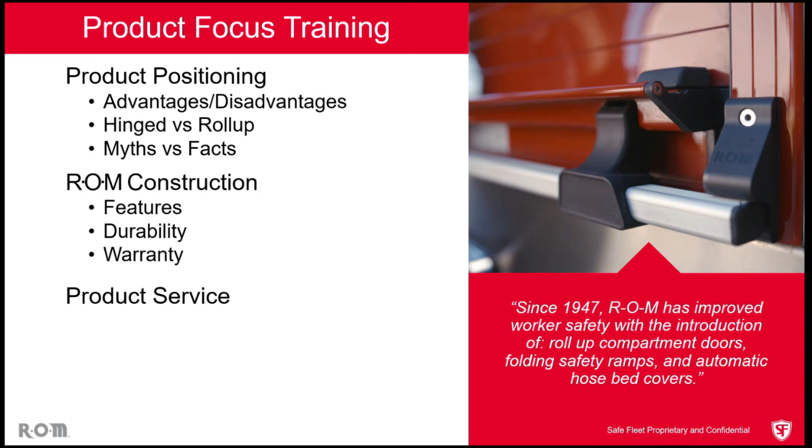We're going to dive in, talk about some of the advantages and disadvantages. We're going to talk about hinge versus roll-up. We're going to try and dispel some of the myths that are out there in the industry by talking about facts, and then we're going to dive into the specific construction of the ROM door.

When I have a hinge door, I've obstructed that access. The hinge door inherently on both sides is blocking that tray. So now I can only access it from the front, which means for the most part, only one firefighter can get in there and get at that piece of equipment.

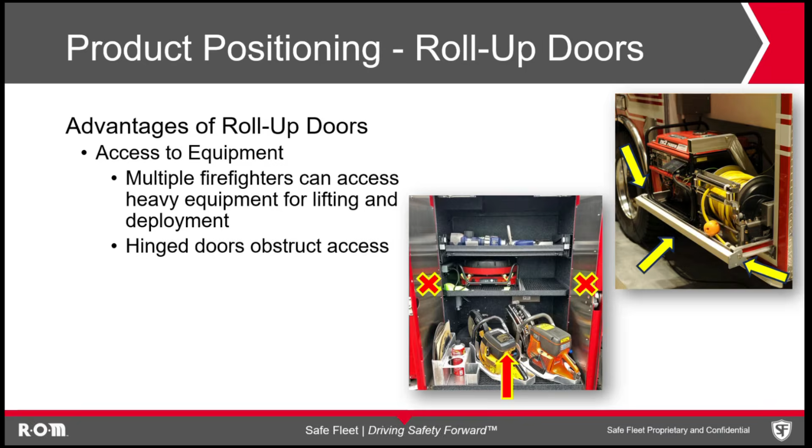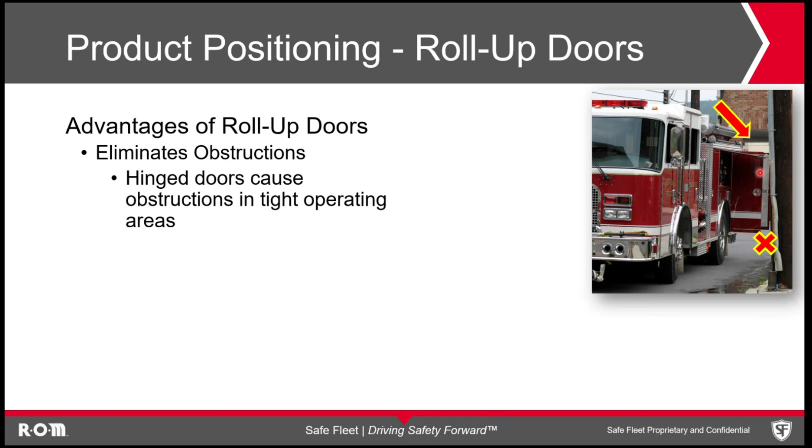The other advantage to roll-up doors is we eliminate obstructions. With this hinge door in this picture, I've got a telephone pole here. If I'm getting something out of this compartment, I now need to go back around this pole because I'm blocked. If the operator didn't stay far enough away from that pole, this compartment would be completely inaccessible because I wouldn't be able to raise the door.

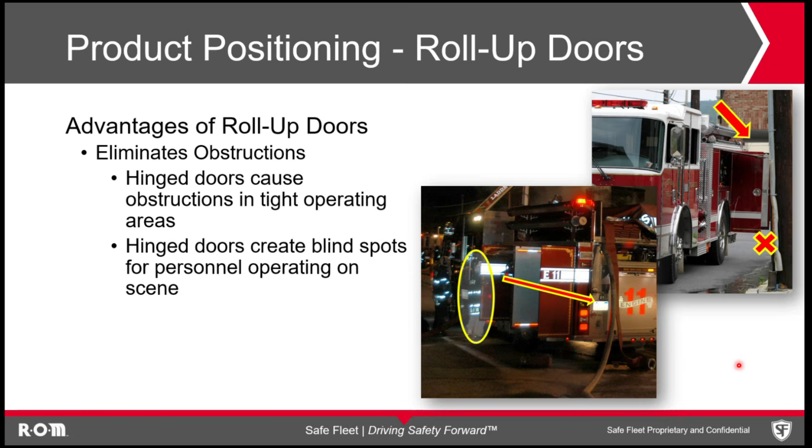Sight lines are also critical. With hinge doors, in this example, I can't see the back of the rig. So the pump operator here in the circle is hidden from potentially oncoming traffic. He also can't see some of these lines that are deployed and operating. With the roll-up door, you just have a clearer area to be able to see things.

Everyone hates the beep, beep, beep of a door being open. There's so many false alarms in the industry that people tend to ignore them. If I ignore that my door is open and I have a hinge door, it can cause serious damage going out of that apparatus bay. In the example here, you see it basically destroyed part of the firehouse. We've seen photos where the entire roof came down because they took out center beams.

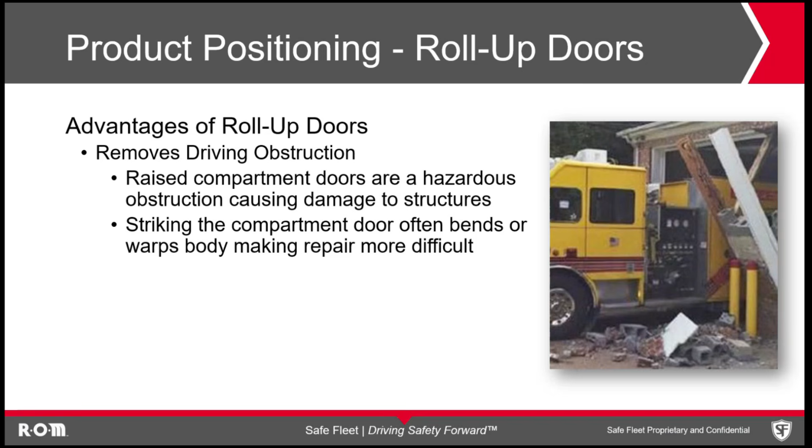With a roll-up door, I wouldn't have this issue. I'd still have a problem with my door being open because equipment could fly out, but at least I'm not going to have a catastrophic failure of my building.

One of the myths in the industry is that when I do roll-up doors, I lose compartment space. That's not true, and we're going to dive in here and explain why this is a myth and not a fact. Our case study is a common compartment, 64 inches tall, 46 inches wide by 24 inches deep.

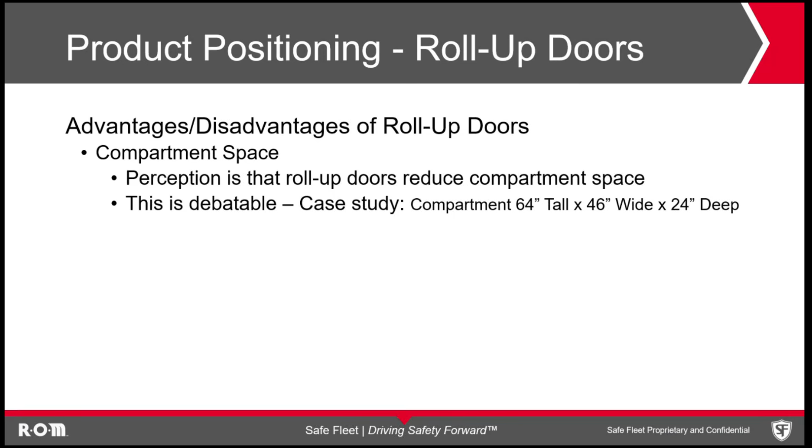This is a cross section of the compartment, 24 deep, 64 tall. With a hinge door, I typically have a 3-inch header at the top, so I end up with a 61-inch door opening. You definitely have more door opening with a hinge door than a roll-up. That's a fact.

With our hinge door, it's typically a 2-inch thick door pan. When I do the cubic footage calculation, 24 by 64 by 46 wide, I have 46 cubic feet of storage space. That's what's in this box. I have to take off some losses. We're going to take the header off as a loss for both hinged and roll-up, then put it back in as hidden storage. Our 3-inch header by 24 inches deep by 46 inches wide loses 1.92 cubic feet of space.

Our door pan is 2 inches thick, and that intrudes 2 inches into the compartment. So if I had a slide-out tray, I have to make that tray 22 inches deep instead of 24. That's 2 inches thick by the full height of the door, 61 inches, by the full width of the compartment, 46. That's 3.25 cubic feet. If I take those two numbers off of 46, I end up with a 40.83 cubic foot compartment. I do have some hidden space up here, this 1.92 cubic feet up behind the header. I can access that. It's hard to get to, but it is there.

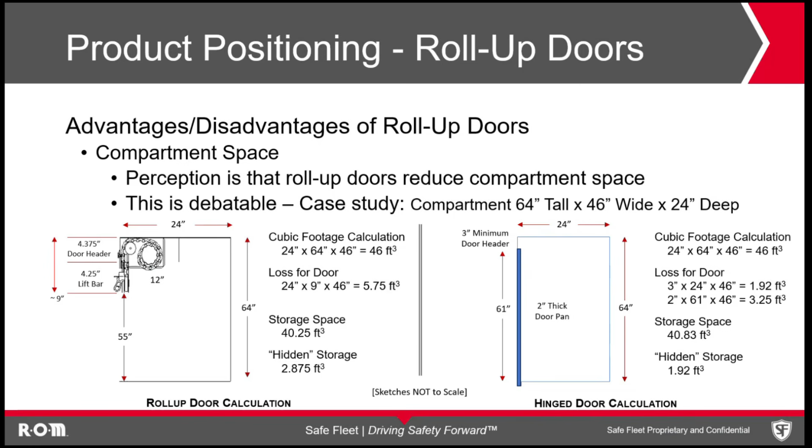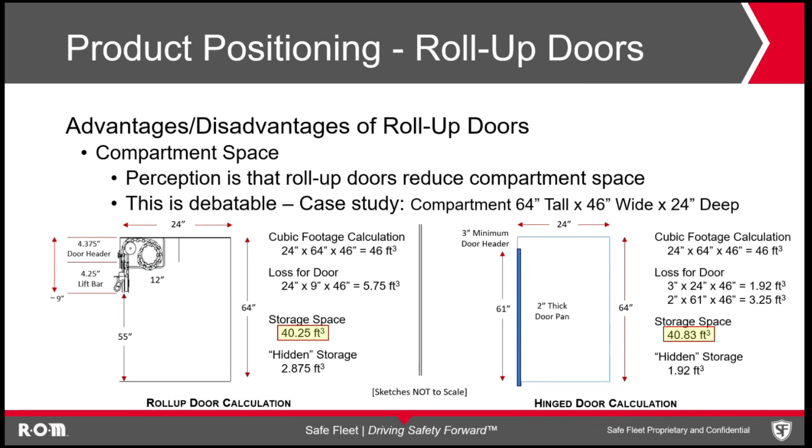Do the math. Do I have less storage space with a roll-up door? Sure, a little bit. We're talking 40.25 versus 40.83. Not that big of a deal. Technically, I do have more hidden storage space behind the roll of this roll-up door, 2.875 versus 1.92. All in all, they store about the same amount of equipment.

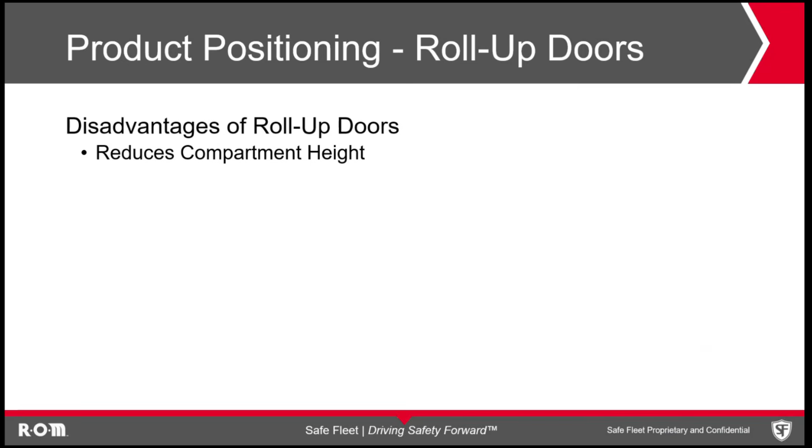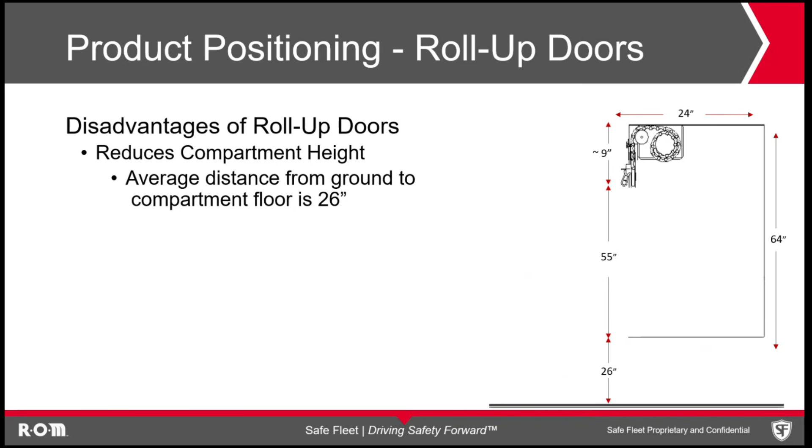We talked about compartment height. Compartment height is definitely reduced. That's not something we can get away from. But let's talk about how you access the equipment in the compartment and if that really matters. The average distance from the ground to a compartment floor is 26 inches. The average firefighter height is 5'11". That means the distance from the ground to this space I lost because of the roll-up door is 7 feet away. Most people can't reach what would be stored in here.

So the fact is the roll-up door definitely reduced the compartment height. It's a 55-inch opening versus 61 on the hinged. Where this would really matter is if I had a vertical pull-out toolboard. That vertical toolboard now could only be 55 inches tall versus 61 inches tall in the other compartment. But the facts are, does it really matter? Can I access and use this space?

Most times when you see roll-up doors, you'll see this space gets used by a hidden tunnel that's accessed from the rear step on the body of the truck. Put things like a ladder down through there. Suction hose storage is very common in that area. So we find better ways to use that space.

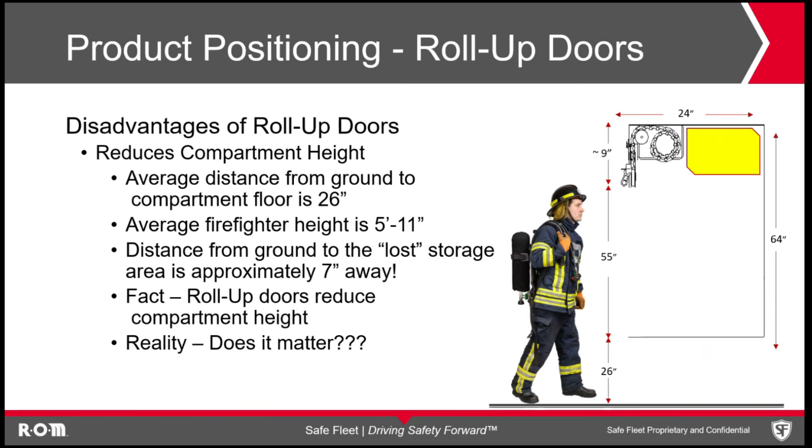One thing with ROM, as we dive into the ROM door and what makes it different, is history. And it's history that you can count on. It's one thing to say we've been in the industry for 40 plus years making these doors. We've been in the industry longer making doors, but in the emergency services on fire trucks, it's been about 40 years. There's well over 500,000 doors in service in some of the hardest run fire departments in the country. That's history that you can count on.

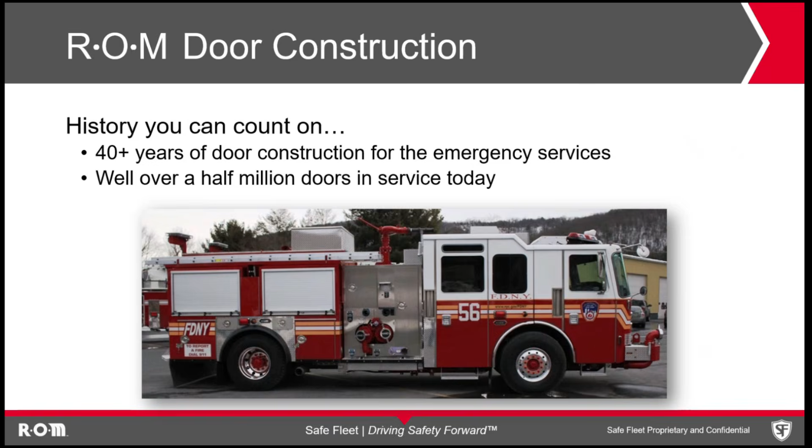What makes ROM different is our door construction. First thing we're going to talk about is our lift bar. Our lift bar is the strongest in the industry with a D-shaped design.

This came out with our Series 4 door. Our Series 3 door had a round bar, and we quite often had complaints where that bar would bend. Listen to the field, listen to your customers. When they've got a problem, you've got to solve that problem. We solved that problem by coming out with a D-shaped design. There's a groove finish in that D bar, which makes it easier to lift and grab.

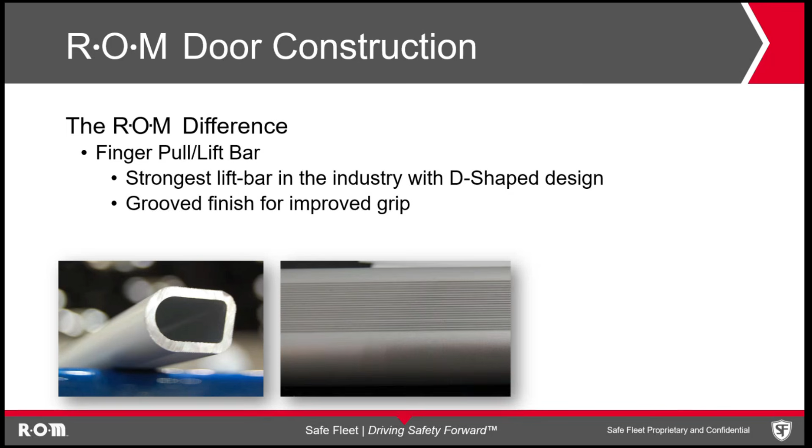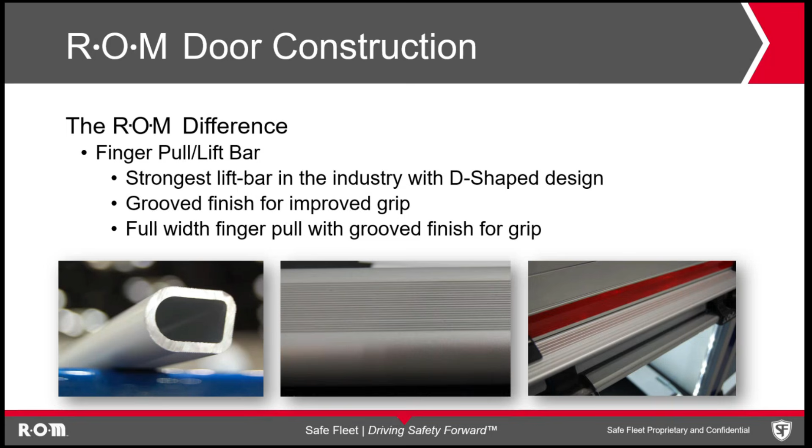And then your finger pull, that's the rail that sits above your lift bar. We go full width with that with a groove finish, which gives you a good surface to pull that door down.

Raising and lowering doors is assisted with a 4-inch operator with a tension spring. That makes it easier to put the door up and down.

That door has to roll up and roll into a compartment. Our idler wheel is made out of rubber. That's done to reduce noise or potential damage to the inside of the door when you raise and lower that door.

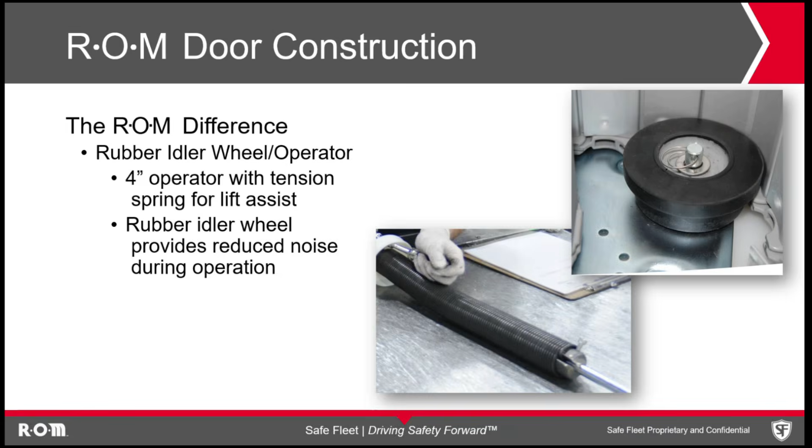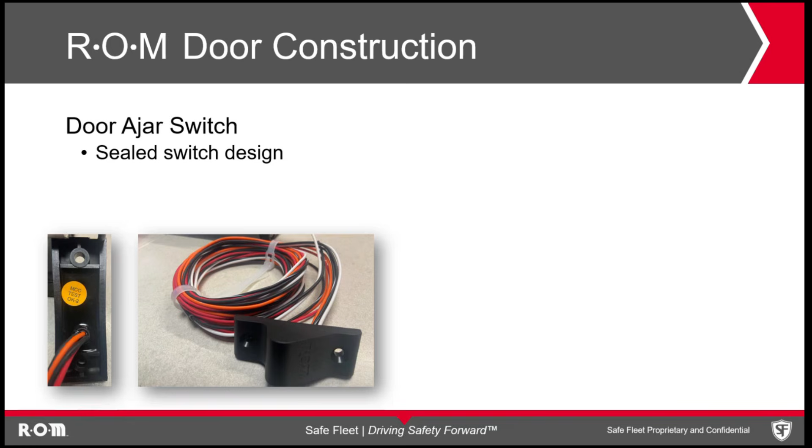Talked earlier about door ajar switches. There's been a lot of developments over the years in door ajar switches. We switched our design to a sealed switch design, an epoxy sealed switch that prevents water intrusion and shorting out of the switch.

And then our magnet. The magnet sits in the lift bar. Traditionally, that magnet could walk down the lift bar. If the magnet walks down the lift bar and gets out of adjustment, then it's not striking the switch when you lower and latch the door.

With the Series 4 door, we molded that magnet into the end cap. So you can see here, that magnet's built into this end cap, and there's no way for that to walk down the rail now. The other thing we do is we glue this in place so that it can't pop out accidentally.

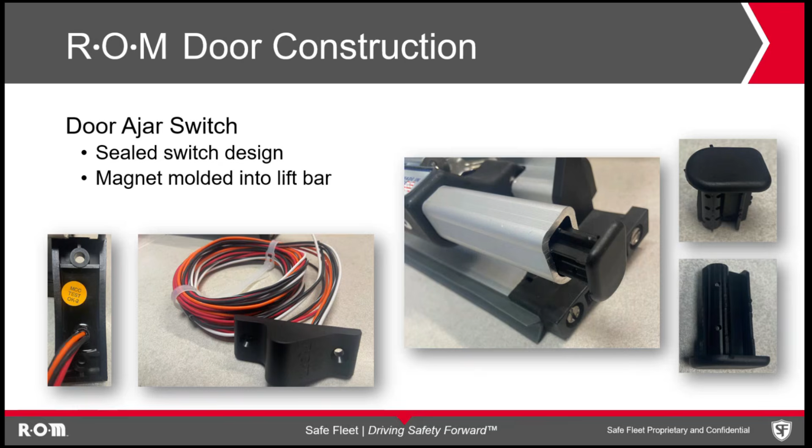When it comes to door construction, the weight can indeed matter. Most people think, well, if I have a thicker slat, I have a heavier door, it's more durable. That's not necessarily the truth. We're going to dive into that subject because this is really what sets us apart from our competition.

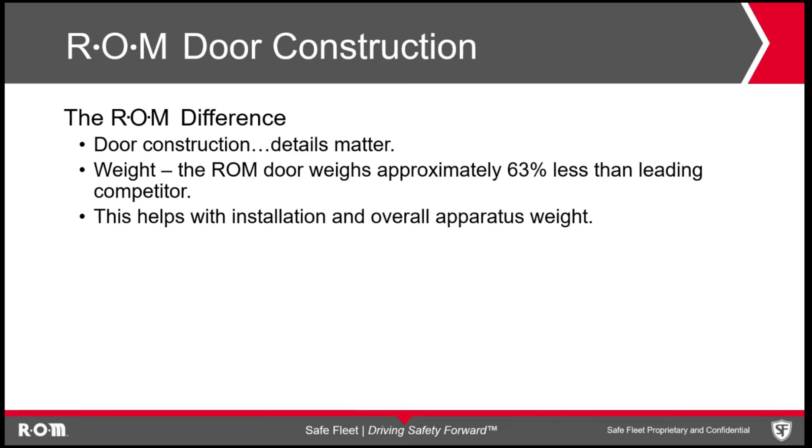The ROM door weighs approximately 63% less than our leading competitor. If I'm building something like a mini pumper with 4 doors, maybe 5 doors, probably not the end of the world. But when I'm building something like a heavy rescue with large doors, talking 8, 10 doors on a truck, think of a tractor drawn aerial where there can be upwards of 14 doors, 63% weight makes a difference. It makes a huge difference in the overall weight of the rig, and it makes it easier for installation and service when you're trying to lift that door.

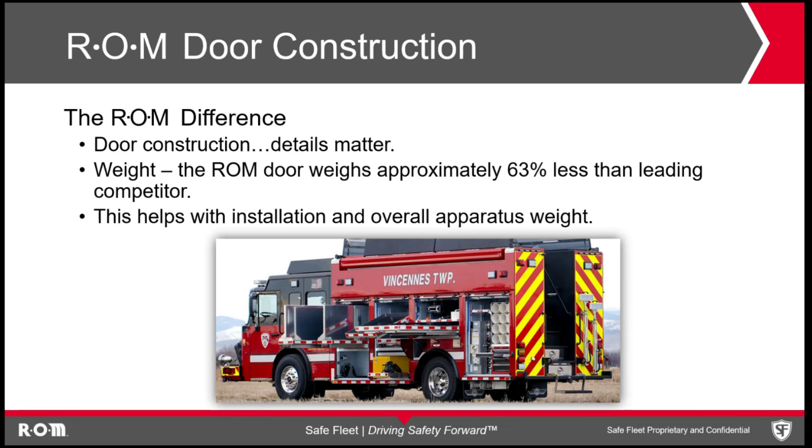What it comes down to is strength. Again, most people think bigger is better, thicker is better, heavier is better. Not necessarily. There is give and take to everything we do in this industry. When we talk about strength, we're considering the durability of the door, the protection for the personnel and pedestrians so that something doesn't come flying off your rig, and then the lifespan. How long is that door going to last?

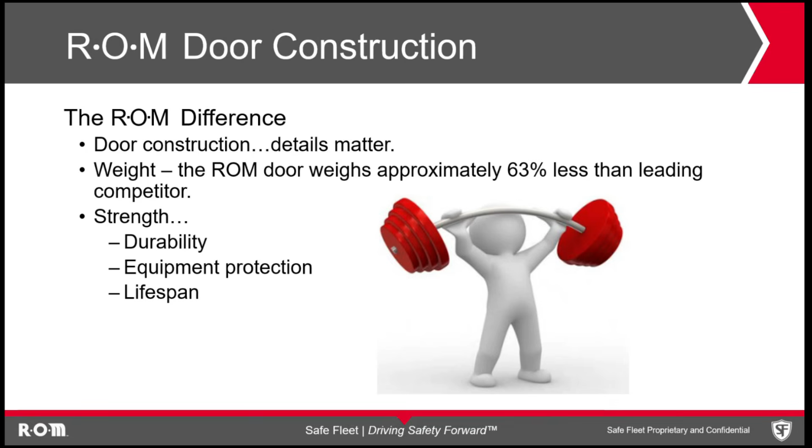We're going to dive into this and talk about the slat thickness because this is really what changes and makes it different. How thick that slat is, is a key engineering thing. Again, bigger isn't always better.

Now, if you go out in the industry, one of the things that people will often do as salesmen is exactly what you see in this video: push on the door and see if it flexes. And what a lot of our competitors will do is push on the door and say, hey, look, see how this one flexes? Push on ours. It doesn't flex. That means we're stronger.

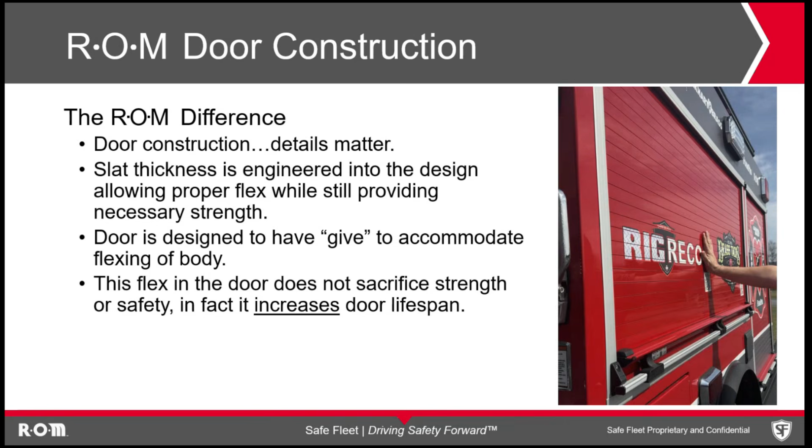Not necessarily. That flex is done by design. That is engineered. That flex increases the door's lifespan. Think about your body when your truck's driving down the road. You hit a pothole, you go through a sharp turn. The body flexes, the body moves. Think about an aerial device when you put it up on jacks. When you put the outriggers down, you put a twist in that body. You need your door to be able to flex to have give and take for this type of environment and the things that we do to our apparatus.

So this flex you see, that's not a bad thing.

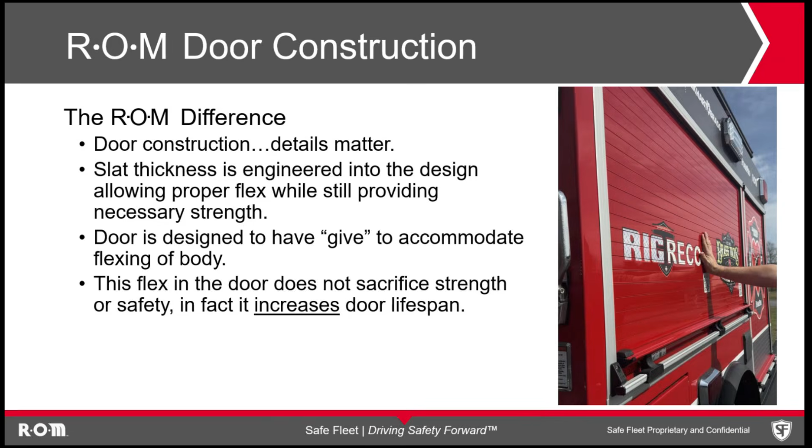So what a cynic would say is, well, if it flexes like that, it's going to break. No, and we've done the testing to prove that. We're thick enough to be strong and prevent issues, but also thin enough to be nimble and keep it lasting in the industry.

The first way we test that is a sled test. The sled test is a 25-pound weight accelerated to 15 miles per hour, which equals 15 to 20 Gs of force. This is a pretty small door in this test, done specifically for an EMS application to prove that equipment inside the compartment wouldn't come through the door and injure the patient or the EMT in the back of the ambulance.

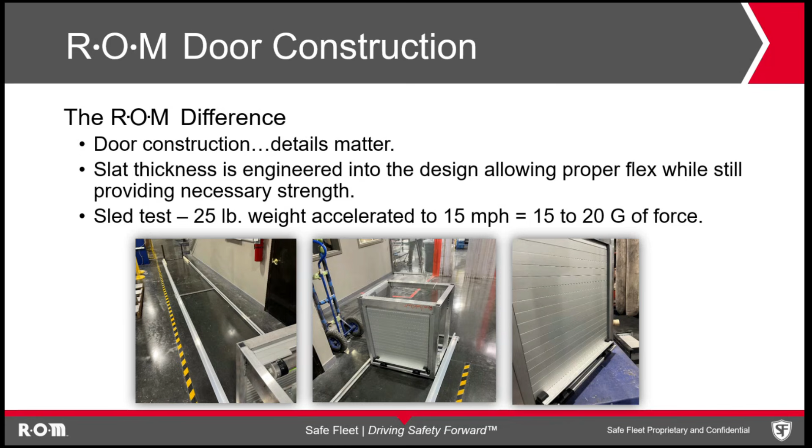That's one thing you can say about a lab, you're testing in a controlled environment. Here's a real world incident that occurred. A 4,500 PSI SCBA cylinder, commonly carried in an apparatus, often in a rack with a bunch of cylinders. Something happened with this rig where a piece of equipment fell and struck the valve and sheared it off, which basically creates a missile.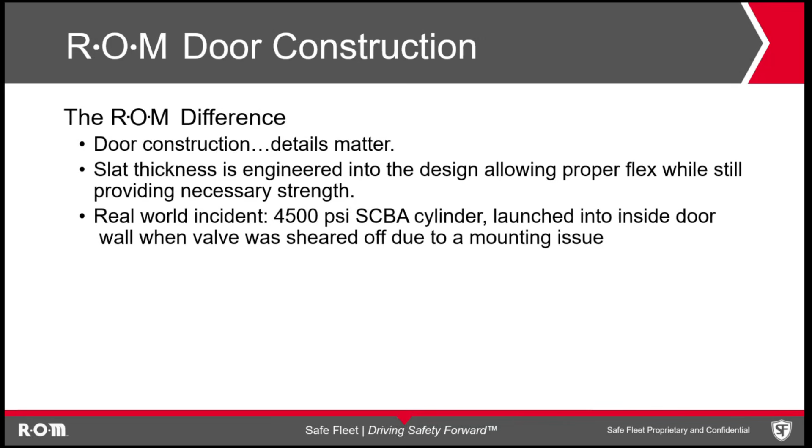That cylinder launched inside the compartment, smashed off the back of the compartment door, bounced back into the tray where it still had pressure and air expelling from it, then launched back into the door again. So it rattled back and forth inside the compartment, striking the door multiple times.

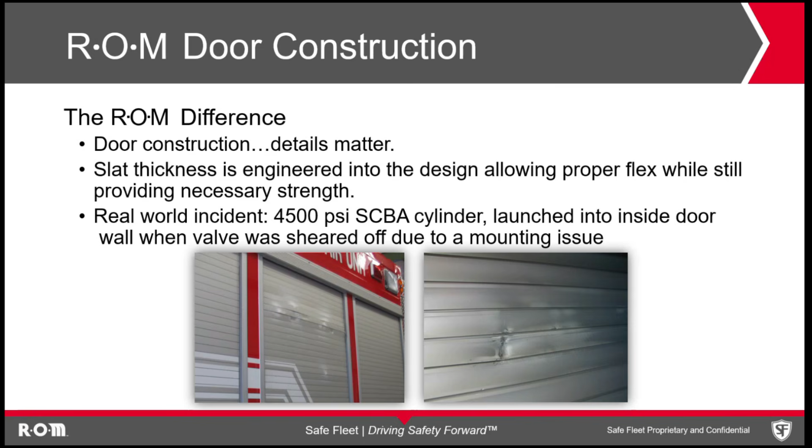The final part is durability. We concern ourselves with how durable the door is and whether it's going to last. The durability test is a 100,000 cycle test of raising and lowering the door, equivalent to opening and closing it 5 times a day for 55 years, well beyond the life of most fire apparatus. If I had a thicker slat that was heavier, I may not pass this test.

That constant up and down is going to cause that door to eventually fall apart because it's heavier and not as rigid, or it's too rigid. It's not as flexible as the ROM door.

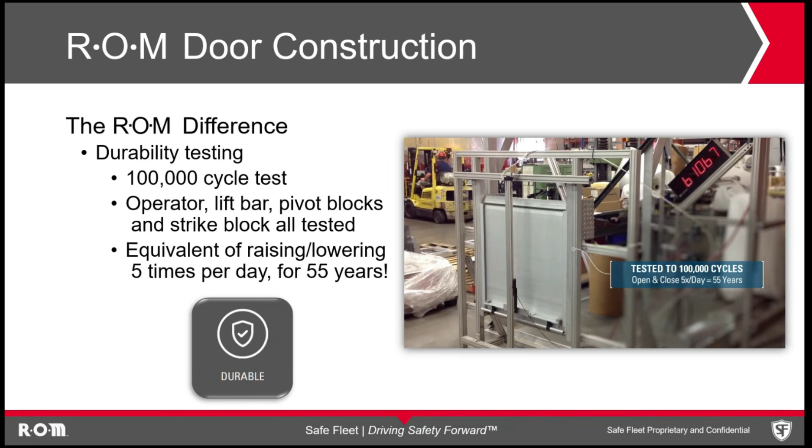The final piece of this puzzle is standing behind your product. We've shown you real world testing, talked about the engineering behind it, shown you our cycle testing, and then we stand behind it with an industry leading 7-year warranty.

It doesn't always come down to, in our industry, the best product. Sometimes it comes down to the best support. And that's another place that ROM stands head and shoulders above our competition.